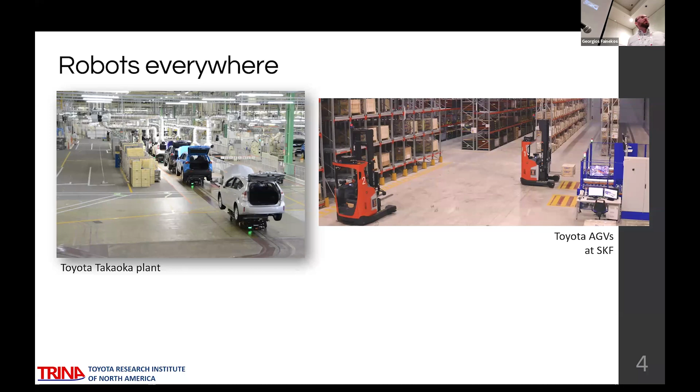Let's move on. Robots are everywhere, and this is a Toyota Takaoka plant. You have robots moving around the vehicles for assembling, robots in logistics warehouses and so on, and more recently robots in hospitals. All these improve efficiency of the system, help in many cases with labor shortages, and so on.

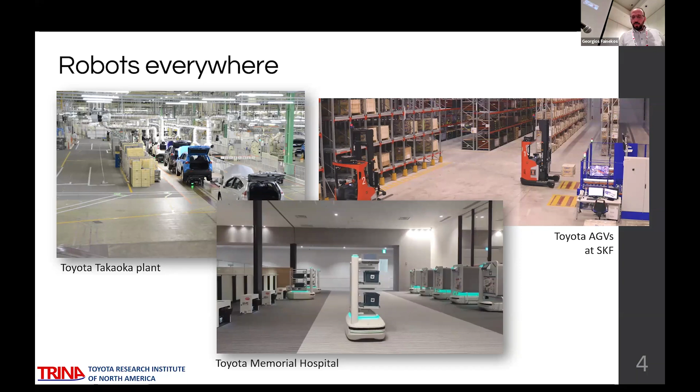I would like to highlight here a recent article by some of our colleagues in Japan, where they published an article exploring the development of a production level system for hospital robots. It's a good read to highlight how they encounter several challenges in that environment and how they overcome them.

For example, when you have robots in an environment, they might block a corridor, right? This is a confined environment. You don't have corridors for robots separate from what humans are using—everybody's working fluently together, so you are going to run into such scenarios. Another example is you may want to have event detection, scene understanding, to see what's happening in that environment. And finally, a lot of simulation-to-real and back testing and verification.

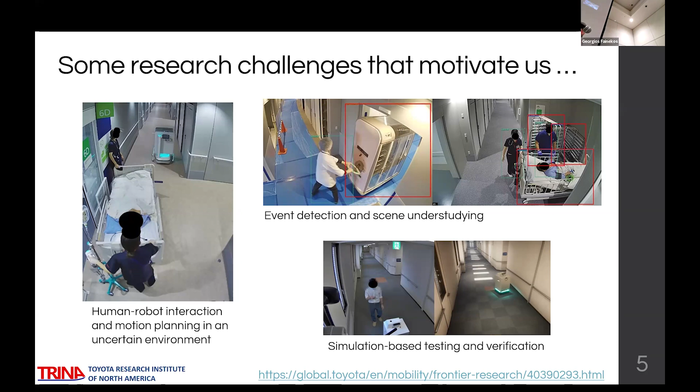Again, this is not our team's work—this is primarily our colleagues who actually develop these products. But we are inspired by these challenges, and we are doing our own research trying to push the frontier. Within that context, we work in all these layers of autonomy, from the global planner all the way down to the low-level control. That's what I'm going to briefly discuss today, taking you on a brief journey from global planners all the way to low-level control, where I'm going to advertise our latest toolbox that's publicly available for control barrier functions.

All right, so I'll start. Since we are just 4 people in that group, we are working a lot with collaborators. So at the conclusions, I'm going to circle back and say we are always open to collaborations—please reach out with ideas.

The first topic I'm going to present is actually the work of Kandai, who is here in the room. He did an internship with us, I believe 2 years ago, and we were looking at how to learn workflows so we can observe existing processes, extract information, build models, and then optimize for cobots or any type of optimization we might like to do. There was also a follow-up work—when Kandai went back to his university we continued working, and he's going to give a presentation on Thursday, so please follow up on that.

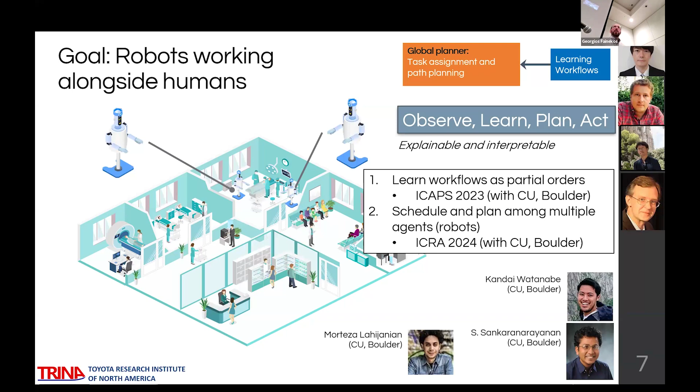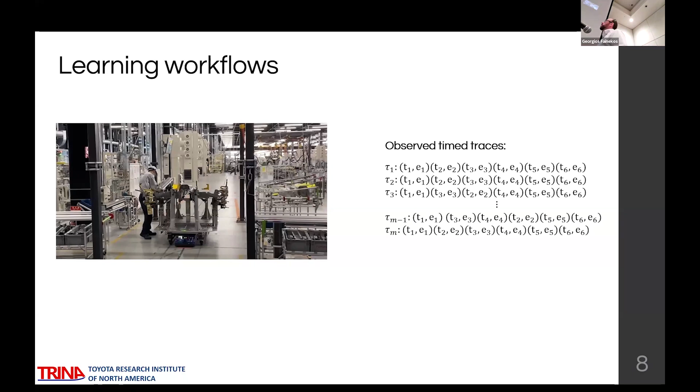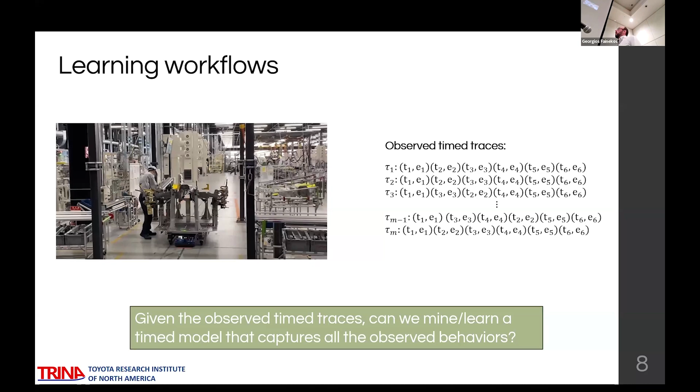Let me give you the basic idea here. Let's say you have a factory floor, workers are doing stuff, and you have a method to extract events occurring in that environment. This will typically look like timed traces: you have an observed event, a time that event happened, and multiple of these. What you'd like to do is collect all this data and learn a timed model that represents the constraints for that process. It doesn't have to be linear—you can have partial order. Let me show you an example.

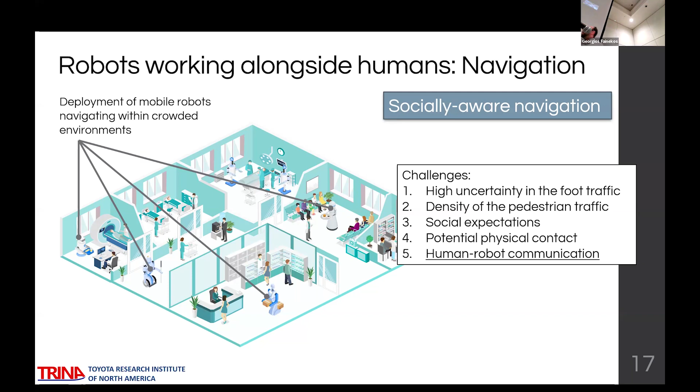So that we can start optimizing the performance of the system overall, human and robots, and avoid deadlocks and other disadvantageous situations. Here's an example—I already showed you one with the hospital robot at the beginning, but here's a simulation. The robot is trying to make a left turn, but it's always interrupted by humans who are completely ignorant that the robot is trying to make a left turn.

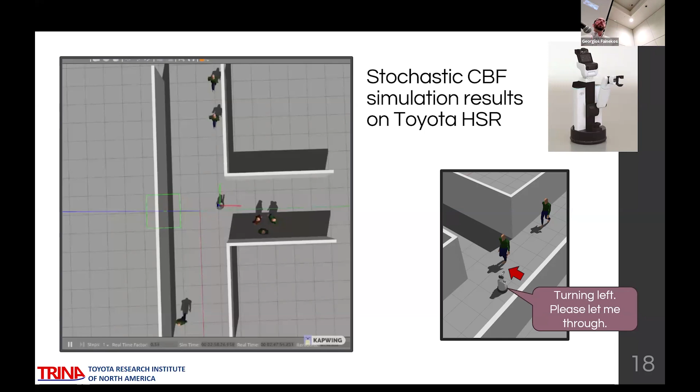So the robot tries to avoid the humans. Ideally we would like to be able to plan for the robot, to plan the communication actions in the environment. So at some point you would like to say, I would like to make a left turn. It doesn't matter what communication modality you're using—are you projecting an arrow on the floor, saying it verbally, using flashlights, or whatever. The question is, when do you plan to, and how do you decide what communication action you should be issuing?

This is work we have been doing with my former colleague and current collaborator, Sid Srivastava at Arizona State University, and we are continuing working along these lines.

So the idea is the following: we do the classical motion planning paradigm, and on top we have what we call a communication planner. The bottom layer is the standard RRT, for example—it doesn't really matter, it's any standard motion planning technique. In this particular case, we use prior work we have done on rapidly exploring trees with control barrier functions as constraints to guarantee safety, but this is agnostic to that. This is just a method we had available to guarantee safety at a low level.

So we have the human motion model to predict the movement of the human from the perspective of the robot, to build this tree. But on top of that, we have the communication planning layer, where the important part is that we have a human sensor model—what the human may be able to perceive from where the robot is and what communication actions it has. Maybe it has some visual communication actions, maybe verbal ones. It really depends. So we have to do a belief update on what we think the human may perceive.

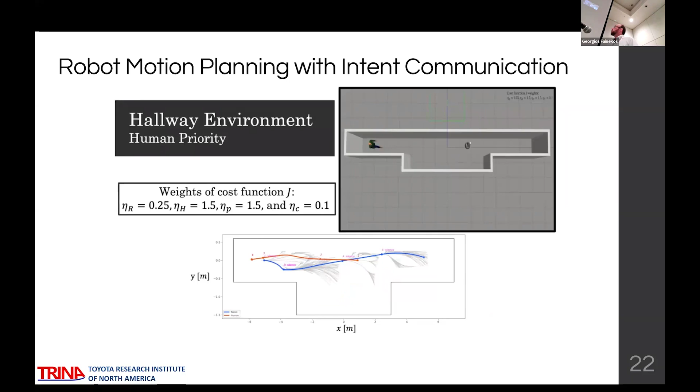The second part you saw there is that the robot did not have priority. Maybe the task it was executing was not time critical, so it stays on the side and lets the human pass by.

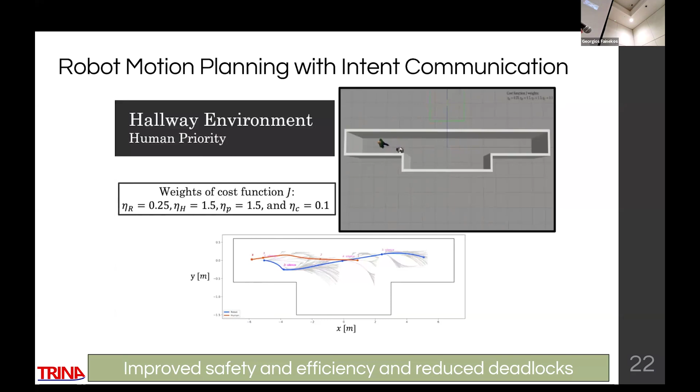So it's not surprising that if you communicate, you reduce deadlocks—this is what you would expect at the very least. Using a social force model for the human motion, you can collect numerical data. You can argue whether this is realistic or not, but nevertheless, when the human collaborates, the simulation experiment shows we can do much better in terms of proximity cost—how close you come to the robot—and deadlocks. In close, confined environments, if you don't have the communication layer, you can get deadlocks. That also connects to the morning talk about communication between robots: if you don't have communication, you can run into deadlocks. Same situation with humans and robots.

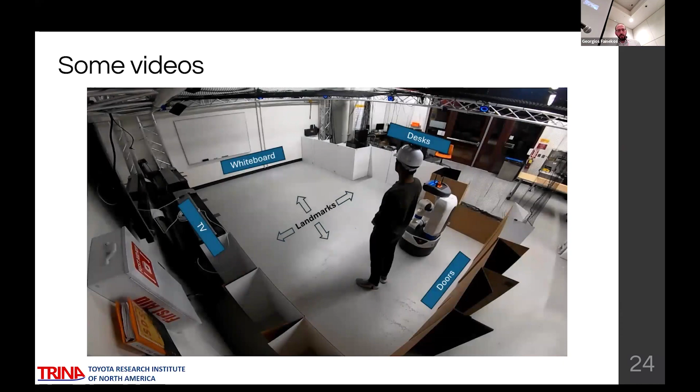We have real experiments trying to move this to more realistic scenarios. This is a scenario that Mehdi, the lead author on that work, has done—a small environment, but it works on a real robot. So this is a robot and human working next to each other, with no interaction here.

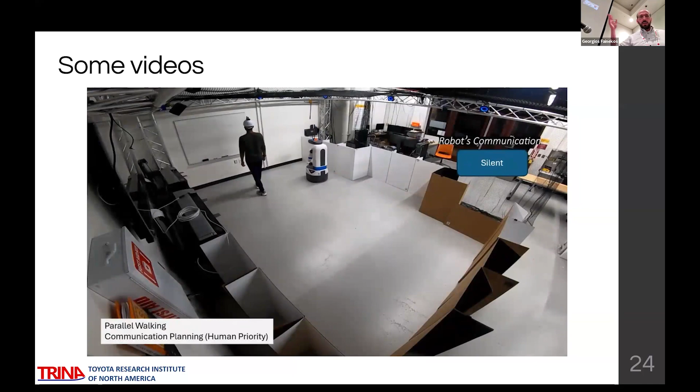I think it's a little bit clunky through Zoom, but you get the idea. You get the same behavior no matter whether the robot has priority or the human has priority.

Things become a little bit more interesting when you would like, for example, to go to the whiteboard. You tell the human, I'm going to the whiteboard. The human hopefully understands that and moves out of the way.

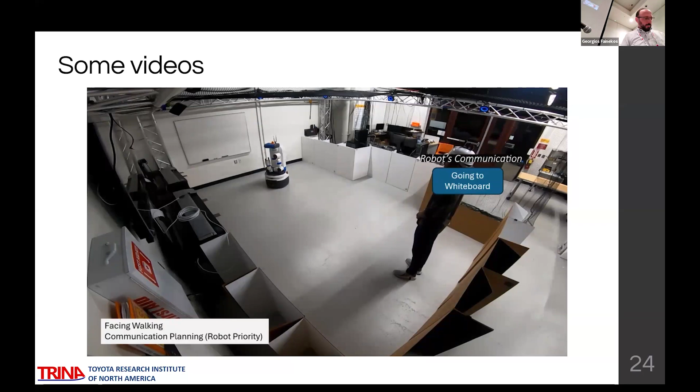So that's the experiments. I'll skip the rest, just to give you an idea that there is progression into that. And I'll go now to the low-level control layer, where we do risk-aware motion planning.

In human-occupied environments, the uncertainty is higher. There is higher risk, and we need to somehow accommodate for that. There is a lot of work along this direction, maybe too much to kind of try to summarize it.

But from our perspective, what we have been doing is developing control barrier functions that take into account probabilities and risk and so on. So let me give you just a brief presentation of the setup here.

We assume that the robot itself is a deterministic agent, has full control of its actions, but the environment is non-deterministic. In particular, all the dynamic obstacles operating in such an environment can be modeled through stochastic differential equations. And you may want to model neighborhoods of humans in case you have social constraints that you would like to take into account, and so on.

Our goal here is to compute control actions, paths, such that the probability of collision within a finite amount of time is bounded, and is bounded by something we choose, this probability upper bound here.

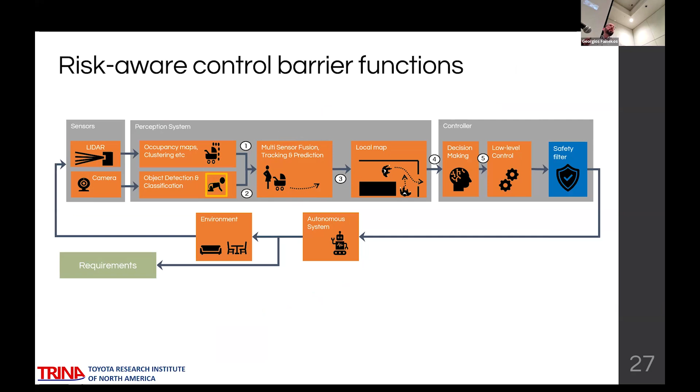And you're going to add the safety filter as a control barrier, as a risk-aware control barrier function, to try to optimize with respect to a reference trajectory produced by the pre-existing control system, so that you satisfy your safety constraints and bound the risk to the desired level.

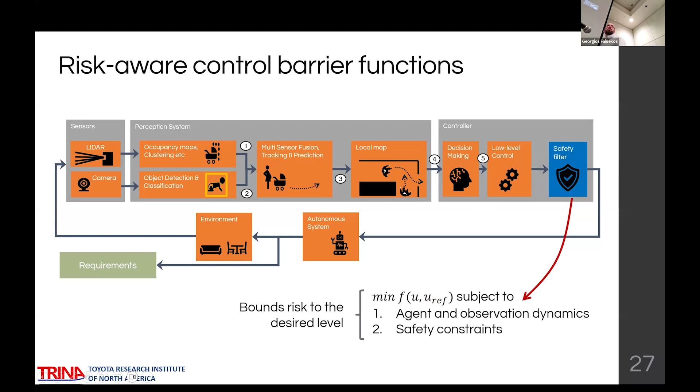Okay, typically this is how it looks like. You have a quadratic program, you have a bunch of constraints so that you can bound the risk. And depending on the exact method that you're using, you're going to get different mathematical formulation here.

And every paper we write has a different controller here, so I'm not going to go into the details.

The reason I'm showing that is that what we are trying to do now, and that's the toolbox that we released, is to make this easy. So we would like to be able to have people code something with a control barrier function, risk or non-risk aware, within minutes, hopefully. So that's the next step I would like to present here.

It is our new toolbox, which we just released on control barrier functions. We utilized functional programming primitives, so everything is encoded within the functions that you are using.

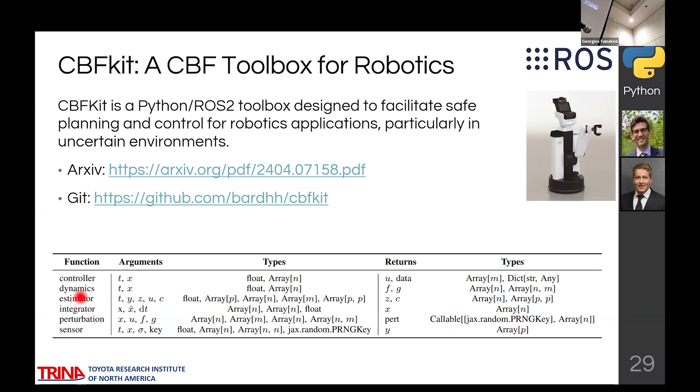We assume that you're going to give a controller, the system dynamics, any state estimator that you might be using, integrator for the simulation, perturbations if the system problem is stochastic, and any sensor model that you're using.

So this toolbox was primarily developed by Bardh and Mitchell, and we asked another intern to use that toolbox without having seen it at all, as a proof of concept that this should be easy to use.

And what we asked him to do is to just implement a very simple collision avoidance controller for two single integrators. So you can think of these as two individual robots.

He did that within 1 hour. So he downloaded the toolbox, read the manual, read the tutorials, and implemented this system within 1 hour, starting from scratch.

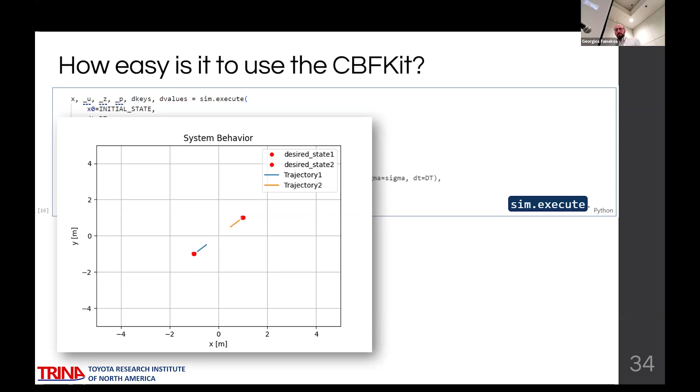All right, he easily did 10 as well, and now he has it in a parameter, so you can do an arbitrary number of robots.

We are also always looking for collaborations on validating, verifying performance, verification, trustworthiness of AI-enabled systems, embodiment, and CPS design exploration. I'll stop here. Thank you, and I'll take any questions if there are any.

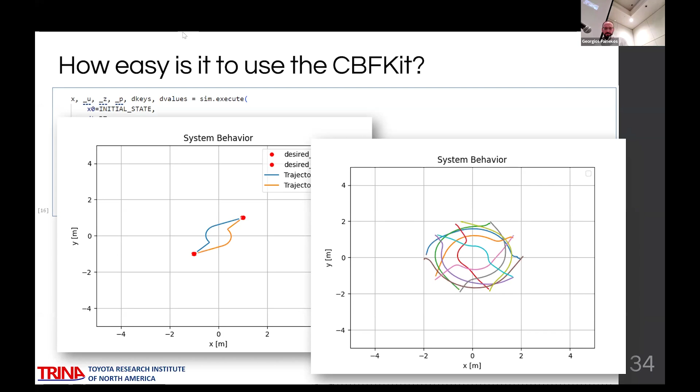That's all. Another question is about the physical velocity you showed in social robots - do you basically also have a trajectory prediction for humans, with a prediction error bound for guarantees on that? So, for example, when you have Kalman filters for doing that prediction, or when you have probability distributions, you can add constraints to take that into account. Yeah, we have papers on that.